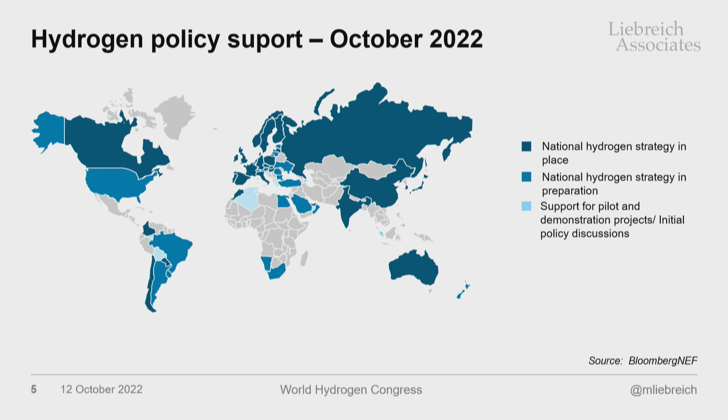And you see the policy support around the world. I don't know how many countries now have hydrogen strategies, but you see there most of them, most of the developed world, hydrogen strategies, and huge amounts of money being dedicated — 430 billion euros. The recent Inflation Reduction Act, we don't even know how many billions, tens of billions, hundreds of billions it could be, because it's uncapped. But we do know that at $3 per kilo of green hydrogen, there's going to be a lot of green hydrogen and a lot of money flowing out of the state's coffers to support it.

I've lived through, I think, 5 bubbles in my professional career, and I'm afraid to say, I start to recognize the pattern. This is Olaf Scholz, German Chancellor: 'Instead of the gas currently used for industry, heating, and fuels, we will ensure hydrogen can be used, the gas of the future. And we will create a huge boom.' I didn't think we were allowed to use words like huge boom at a hydrogen conference.

In the UK, we have the new Secretary of Energy, or Secretary at BEIS, Business, Energy, Industrial Strategy: 'I think hydrogen is ultimately the silver bullet.' You could hardly get more hyperbolic in these politicians' views.

And that is really the background behind what I tried to do with the hydrogen ladder. Because this view that hydrogen is the silver bullet, hydrogen is the Swiss Army knife — this is a dangerous view. This leads us into bubbles.

Now, the Swiss Army knife — actually I was very proud because Bill Gates said some people call it a Swiss Army knife, and I'm like, yep, that would be me. But the analogy is a little bit too good.

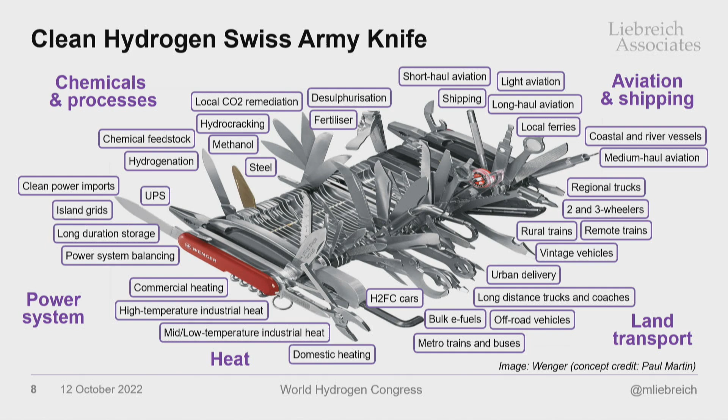Because you can cut your hair with a Swiss Army knife. And you can prune your trees with a Swiss Army knife. And you can replace a tire on your great Dutch bicycle with a Swiss Army knife, but you don't. And the reason you don't is that there's always something cheaper, safer, easier to use. And what you actually use a Swiss Army knife for is the stuff that nothing else can do. In my case, opening a bottle of wine on a camping trip.

Now, I do not want to give the impression that I hate hydrogen. I get asked, Michael, why do you hate hydrogen? Let me tell you, I feel no hatred towards any element on the periodic table. Let's be completely clear.

I am delighted, I am thrilled. Look how many people here. By the way, too many men, not diverse enough. We all need to do much, much better on that. But look how many people here, serious people. There's money in the room, there's engineers in the room. It's tremendous, and there are reasons for optimism, great reasons for optimism.

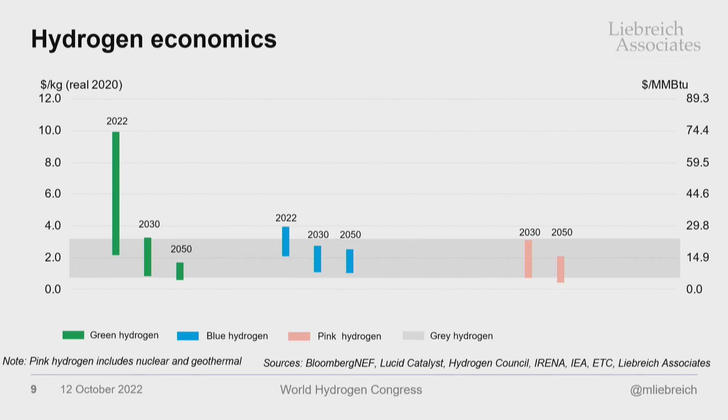Here you can see the experience curve will do for hydrogen, green hydrogen, what it did for solar, what it did for wind, and what it is doing for batteries. We're going to get cheap green hydrogen, eventually perhaps even cheaper than grey, unabated hydrogen from natural gas.

But you know, this is the sort of idealistic vision of hydrogen. We've got all these colors, all these different ways of making clean hydrogen. It's marvelous, it's fantastic. This is the sort of Teletubbies view of the hydrogen future.

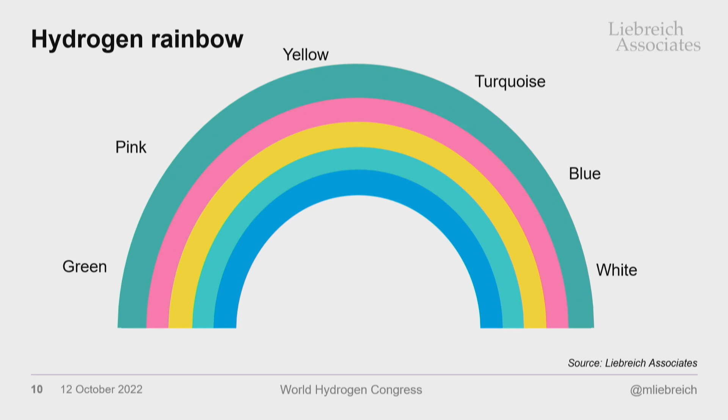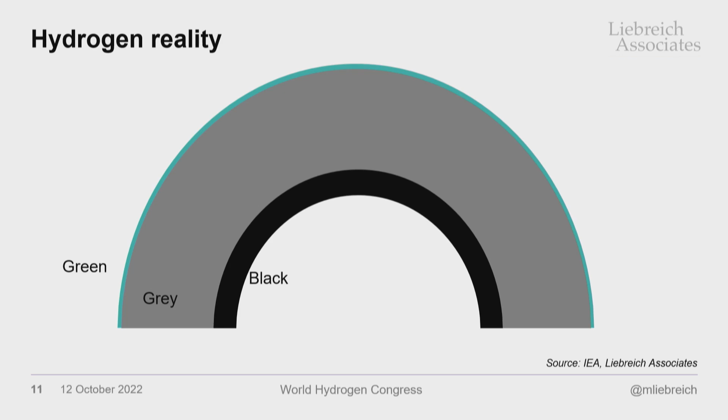Sadly, we live in the hydrogen present, which looks like that. Mostly grey from gas. Next biggest is black from coal. And after that, a teeny bit of green.

And the grey hydrogen and the black hydrogen is growing. You haven't even managed to do what renewables and energy efficiency and natural gas have done to emissions from the rest of the energy system - capped them, made them actually reach a plateau. Grey hydrogen, black hydrogen, still growing.

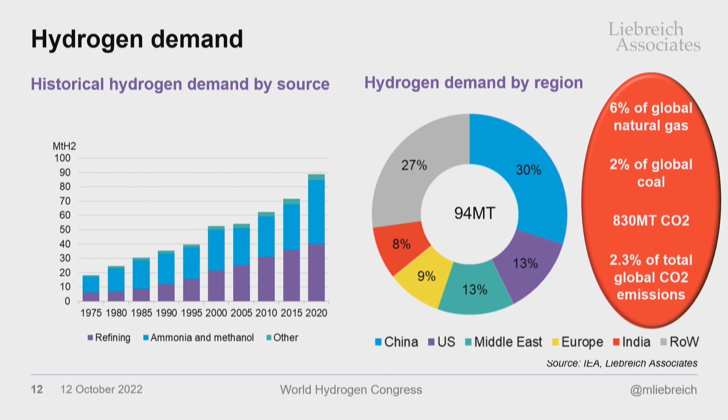94 million tons a year of the bad stuff. 6% of natural gas used to make hydrogen, 2% of coal, 830 megatons of emissions, 2.3% of global emissions from the energy system. Before we position hydrogen as the solution for climate change, we first have to deal with hydrogen as a problem in climate change.

And also behind the ladder is this thinking: just because you can do something with the hydrogen Swiss Army knife, it doesn't mean you will, because you're in competition not just with diesel, petrol, coal, gas - you're also in competition with other clean technologies.

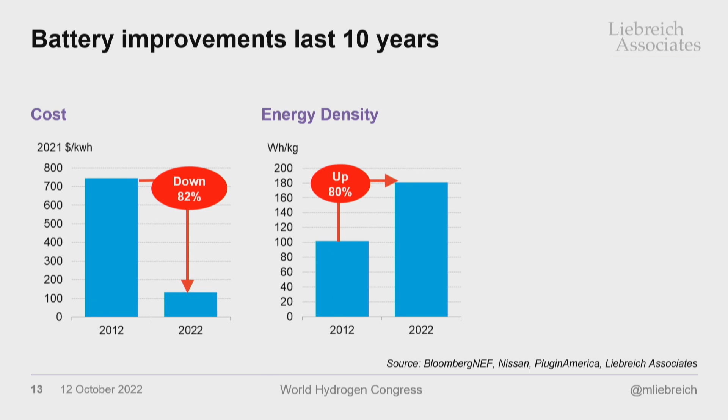We will do as an economy whatever is cheapest and most convenient, and hopefully also clean. But just because we can do something that's elegant, that engineers like to work on, that's not enough. So we've got batteries - costs we all know, down 82% in 10 years, but also energy density up 80%. And the degradation rate, the cycles, the lifetime has improved also. Degradation rate has halved.

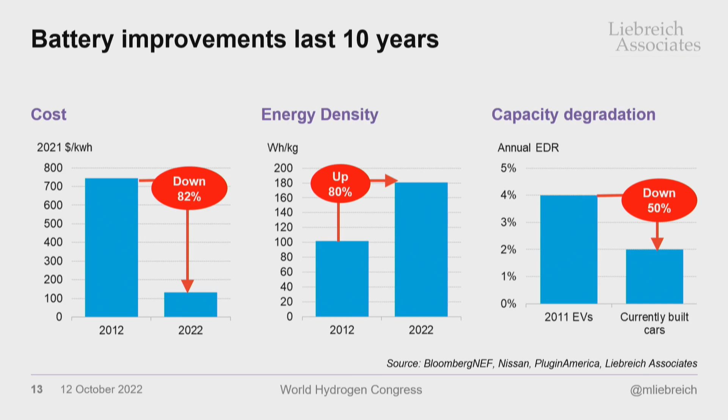You are in competition with electrification of everything. And that's the background to the ladder.

Thank you, Eric. I was out drinking, partying, and shouting at people too late last night about hydrogen.

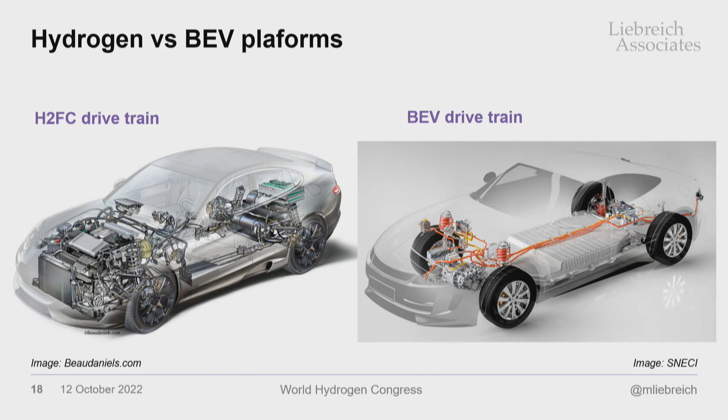Now let's start. We'll dive in, look at some of these sectors. We'll start with fuel cell cars. That's a fuel cell car, and that's a battery car. Any engineers in the audience? Hands up, engineers. Which one's easier to make? Which one's easier to maintain? Which one's going to be cheaper?

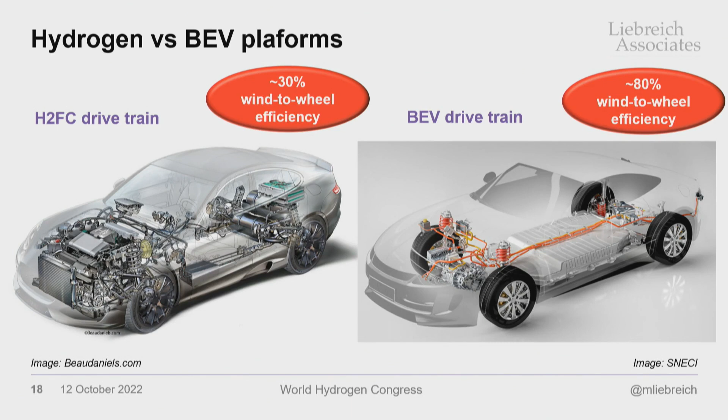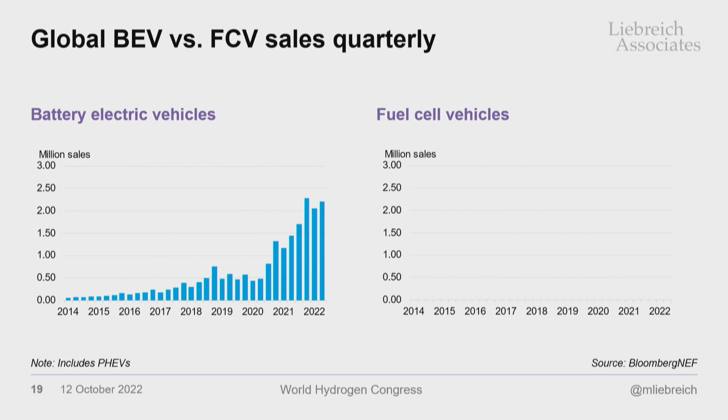Buses are going to go the same way. Montpellier gives us an example. I know there are examples of people very happy with their hydrogen buses. I was on the board of Transport for London. I couldn't get the management team to tell me how much they cost to maintain.

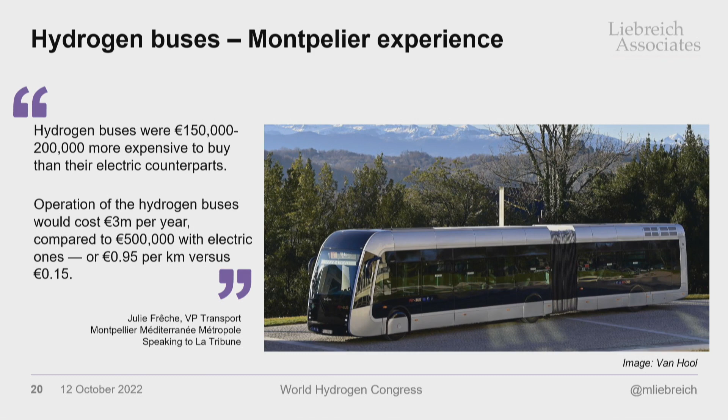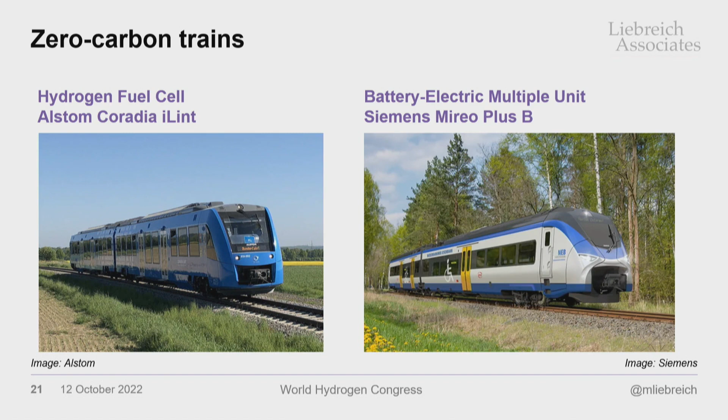Trains - yes, you can do a hydrogen local train, but why would you? It's called battery on a train. So simple.

Trucks - people say that'll never work for heavy vehicles. Do you know what? Take a 40-ton truck, take out the engine, take out the gearbox, take out the differential, take out the fuel tank, take out the exhaust system, take out the vibration management stuff, put in some heavy batteries, and you end up with a slightly heavier vehicle. And all you have to do, particularly in Europe, is drive for 4.5 hours, and you have to stop, according to the European Working Hours Directive, for long enough to recharge your battery.

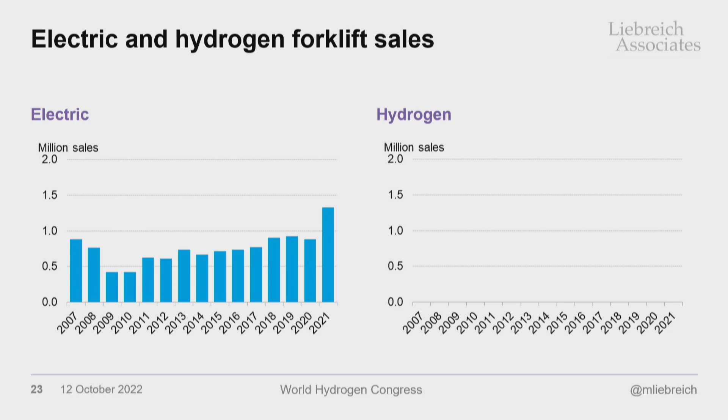Now, it doesn't mean that there'll be no solution. If you go back to the ladder, you'll find that this - my friend Anthony Bamford - where there are no plugs, hydrogen is a contender. Forests, construction sites, road grading, and so on. Maybe we'll do that with biofuels. It'd be pretty simple, frankly. But maybe we'll do it with hydrogen.

Heating - hydrogen boilers being promoted heavily in the UK. Promoted heavily.

They don't want to talk about the cost and difficulty of switching 5,000 homes in 5 days, every single appliance, checking the pipes, swapping out all the meters. They don't want to talk about that and how much it would cost. What they want to talk about is what they call 'keep the boiler, change the gas.' Hey, that's a slogan we can get behind, right?

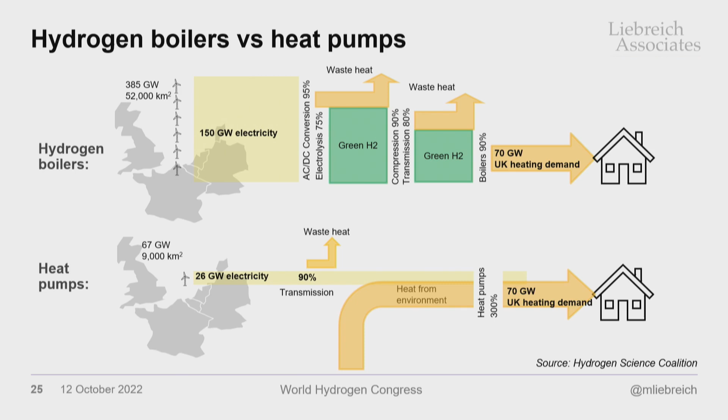But of course, heat pumps need 6 times less electricity than green hydrogen. Yeah, we can do this. There are no hydrogen boilers.

Now shipping, that's LNG, right? We had Chancellor Scholz go over to Canada and he said we're going to import hydrogen from Canada. He didn't say we're going to import ammonia, he said we're going to import hydrogen. So we're going to import hydrogen. And that's an LNG carrier, Q-Max, right?

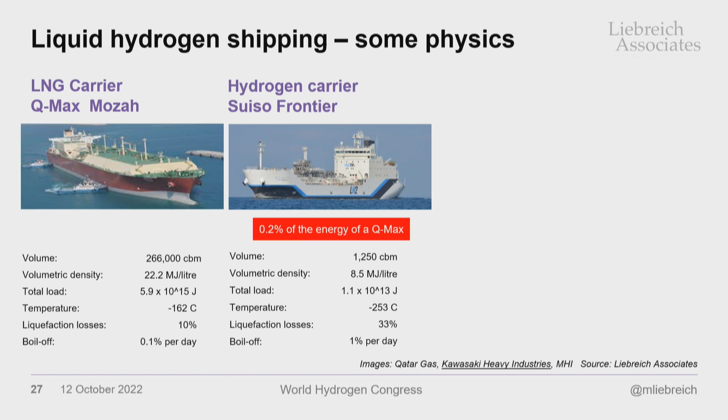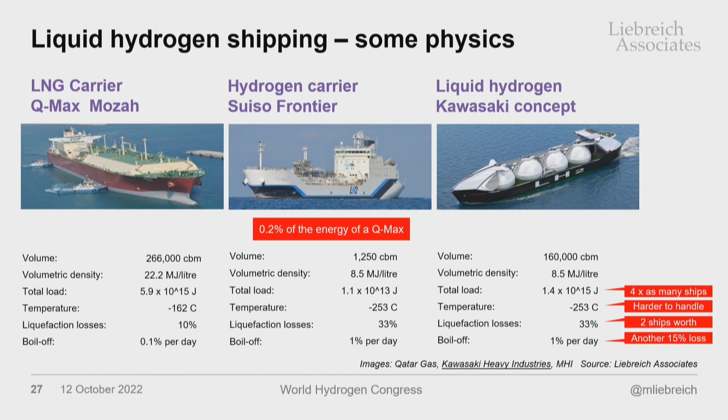You can see there the amount of energy that it carries. This is the first ship for shipping hydrogen, and it carries 0.2% as much. Okay, it's a trial. We could end up with one of those. That's a concept. The problem is, whilst hydrogen is energy dense gravimetrically, volumetrically it isn't. This is like shipping expanded polystyrene. It's not going to happen.

I'm sitting here in Rotterdam. I'm so sorry, you're not going to be importing hydrogen. Now, you might import ammonia, green ammonia - you almost certainly will - but it will be used in the chemicals industry. If you think any business, any value chain that goes electricity to hydrogen, to ammonia, to liquefying and shipping it, to expanding it, to then generating electricity with 22% cycle efficiency, and then the people using that are supposed to compete with the people using the electricity at the source country - forget it.

Sadly, it means Europe is going to lose its energy-intensive industries, and we need to get to grips with that politically.

Now, we could do aviation. This is a Boeing 747 - 200 tons of fuel. You want to do it with hydrogen, fantastic, 73 tons of fuel, although of course the tanks will weigh 5, 6, 7, 10 times that. But the big problem is the swept volume - 1 million liters of hydrogen to have the same energy content. Not going to happen. I don't care what Airbus says.

Liquid ammonia doesn't work. If you're going to do liquid ammonia, you might as well do wood pellets.

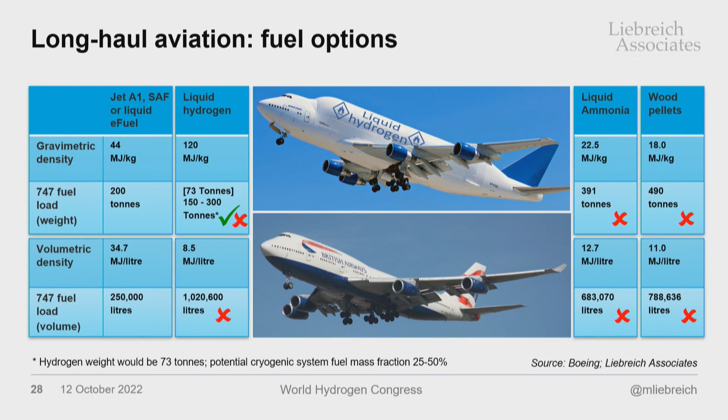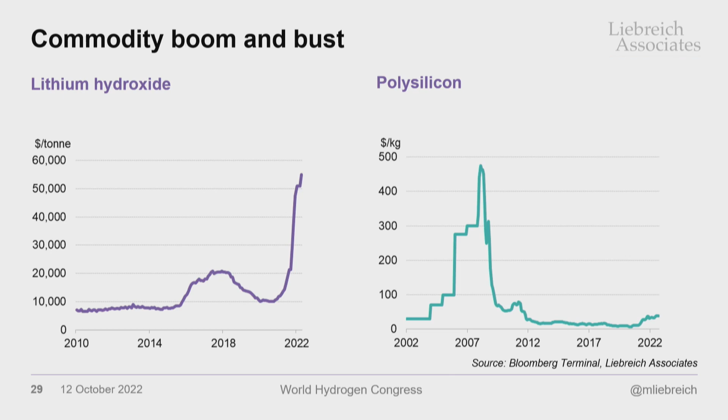Now, this depends on there being enough battery materials, and that's a very long presentation - we're seeing lithium prices soaring. But we saw this in the solar space - they come back down. There is no shortage of lithium in the world, there is no shortage of copper in the world, there is no shortage of the key materials for the electrification route.

And we need to talk volume here. Up at the top there, if we want to do just green, 143% of all the wind and solar installed to date would be used just to do the top row. You want to do the second row, 400% more. Just the top 2 rows - the stuff we must absolutely do, and the stuff we probably are going to do - is 5 times all of the existing wind and solar.

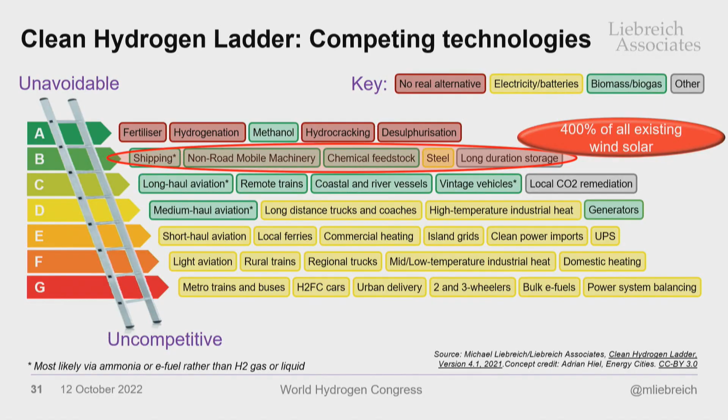Before you've decarbonized existing electricity supply, and before you've done any of the other rungs of the ladder via electricity. What I'm saying here is the supply chain for renewables is not going to cope if we do anything other than the most essential.

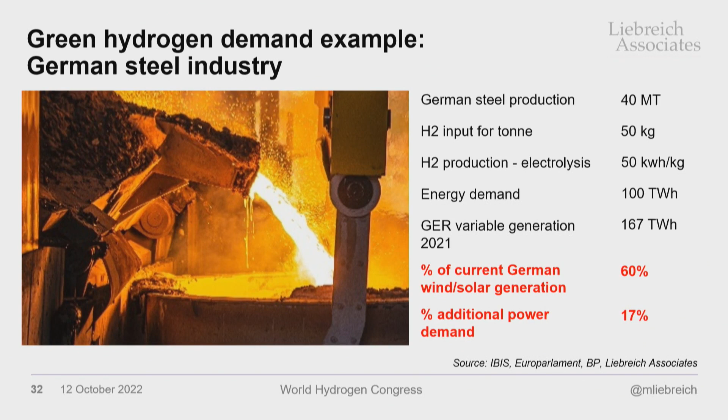Steel - you do the German steel industry, that takes up 60% of current German wind and solar output. You just do Schiphol Airport, that would be 60% of all Dutch renewables. This is just one sector in one country. If we go to ammonia shipping, it's 300% of China's current renewables output. The numbers are staggering - scale.

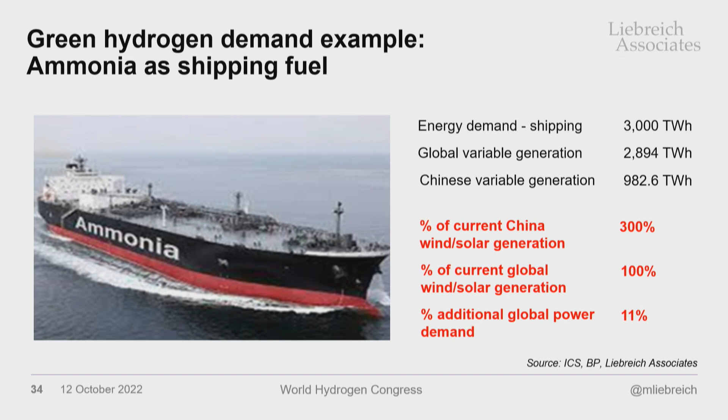So where does that leave us? What it says is that hydrogen is a difficult-to-handle industrial gas. We use 94 million tons of it. It emits huge amounts of carbon, and we need to fix that. And that's going to be done in hubs.

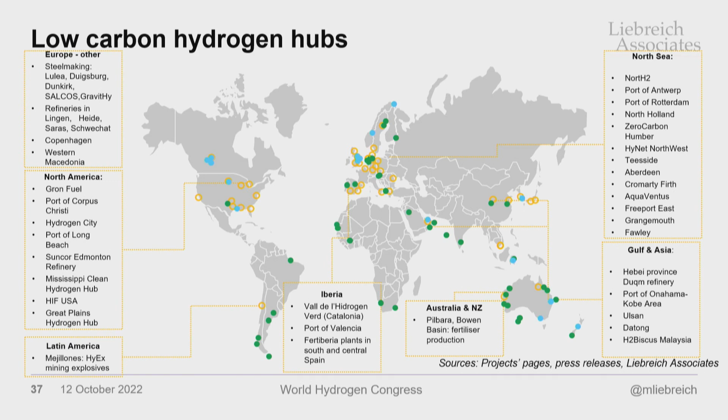Eric, I'm nearly done, to your point - hubs. This is where we're going to be doing hydrogen. And then where are we going to get that hydrogen from? We're going to do massive green projects and blue projects. Thanks.